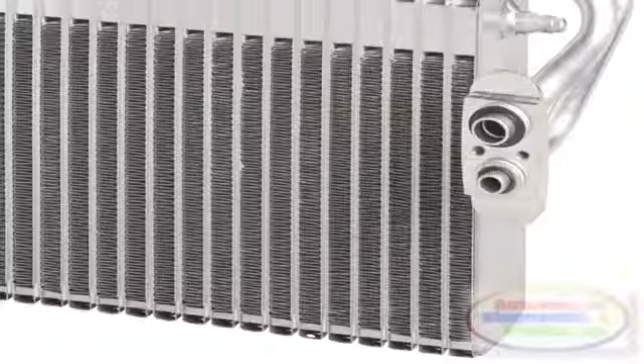The HVAC automotive evaporator, or core, as it is sometimes called, is a form of temperature exchanger, one of three temperature exchangers in a modern automobile. It is in charge of cooling the interior cabin.

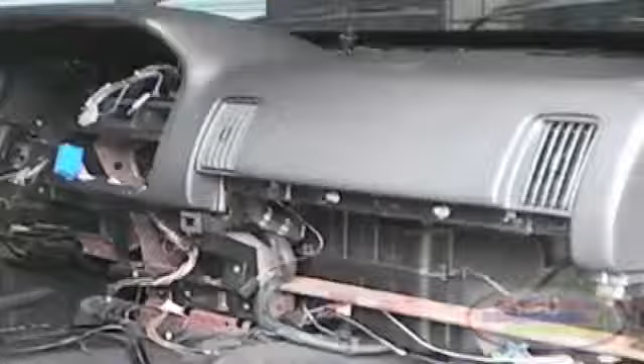The other two temperature exchangers are the heater core and the condenser. The evaporator core is also buried inside the instrument cluster or panel, often by the glove compartment.

Some vehicles have two evaporator cores. One instance is when it's a large van-type vehicle, with one at the front and one at the rear of the vehicle. The other instance is in dual temperature zone cars, mostly the higher-end models.

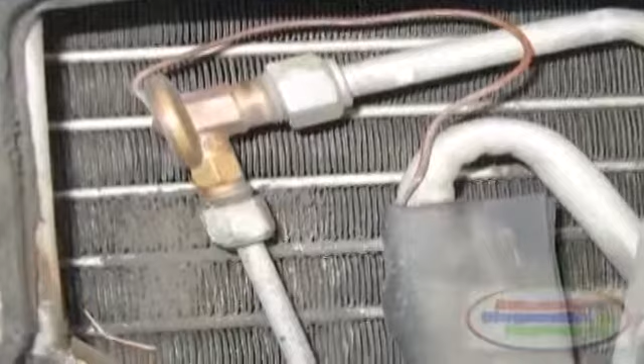Evaporators are usually made of aluminum. Older R12 evaporators were often copper, but this is not a good idea on R134A.

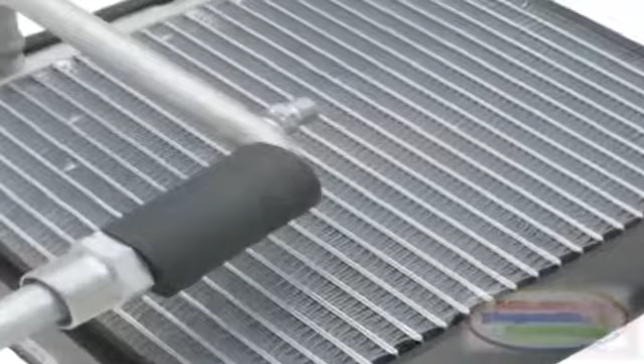Evaporators look like, and in fact are, similar to radiators, but thicker and smaller in general size. Evaporators consist of a series of internal tubes with fins attached to them to displace heat or cold. Air will pass unrestricted through the fins, just like a coolant radiator.

The passages in the evaporator carry moving refrigerant in a gaseous form. It is precisely placed after the expansion valve, where refrigerant changes from liquid to gas and also gets very cold.

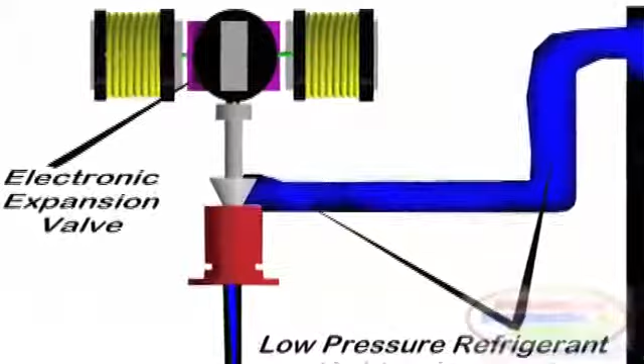The vehicle's blower motor has the task of flowing air through the outside of the evaporator, where it gets cooled in the process. Since heat always travels from a warmer area to a cooler area, refrigerant flowing inside the evaporator absorbs heat from the warm air.

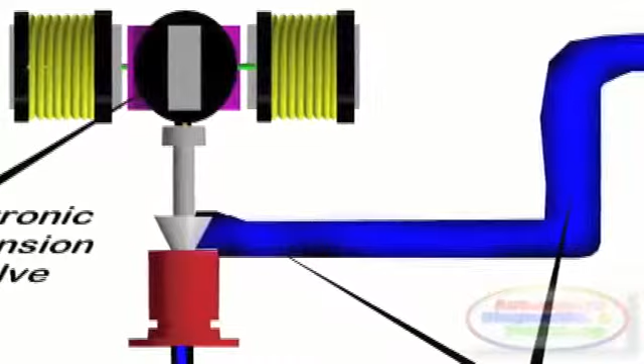Also, at the same time, humidity in the air condenses on the evaporator's surface, and eventually drips out the drain tube to the outside of the vehicle, which is why you see dripping water when the AC is on.

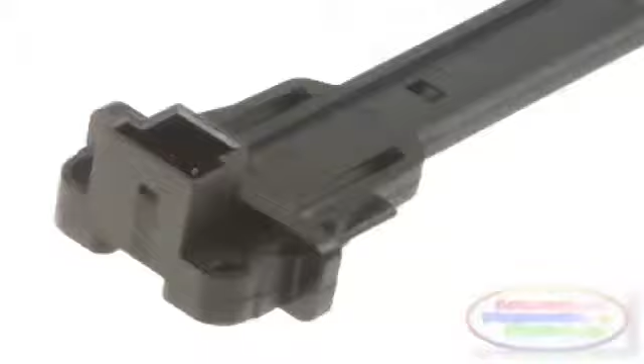The evaporator may also be equipped with a temperature sensor. The sensor signals the AC head or computer what the evaporator core temperature is. Then the AC computer module uses the signal to adjust various components, such as the AC motor actuated flaps, the compressor displacement, and even the blower motor.

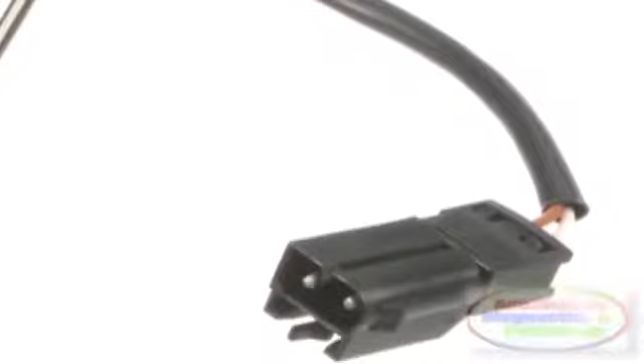Adjustments are a must on newer electronic climate control systems, where every speck of efficiency is drawn from the system. According to the rules of physics, the AC doesn't really cool the air, it simply removes heat from it, and also as an added bonus removes humidity.

Issues with the evaporator are always related to leaks and perforations in its thin aluminum skin, which has to be thin to keep a good temperature exchange index.

When doing a retrofit from R12 to R134, remember not to use a copper evaporator. Aluminum transfers heat a lot quicker than copper and therefore is the only choice for R134.

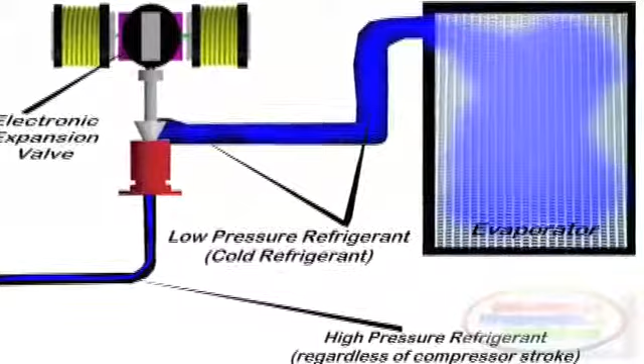Replacement of the evaporator, although not a costly part, requires a lot of work, due to the disassembly and tear down of the dashboard. Replacement also involves evacuating, vacuuming, and recharging the air conditioning refrigerant. Knowledge of the equipment and vehicle being worked on is the key to a successful evaporator core replacement.